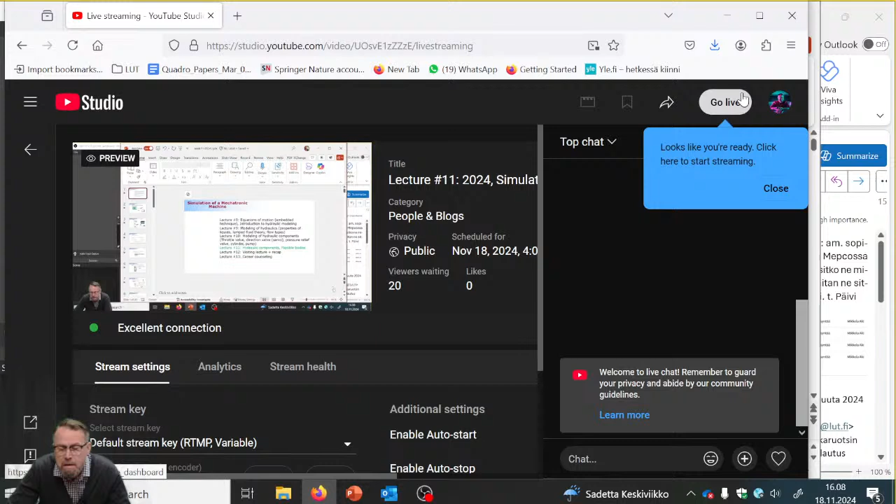Okay. So particularly I'm interested to see how is my voice. Is it loud and clear? So if you can listen to me. So it's going to introduce a little bit of echo, but I think it is okay. Is it loud and clear? Is it loud and clear? Okay. Nope.

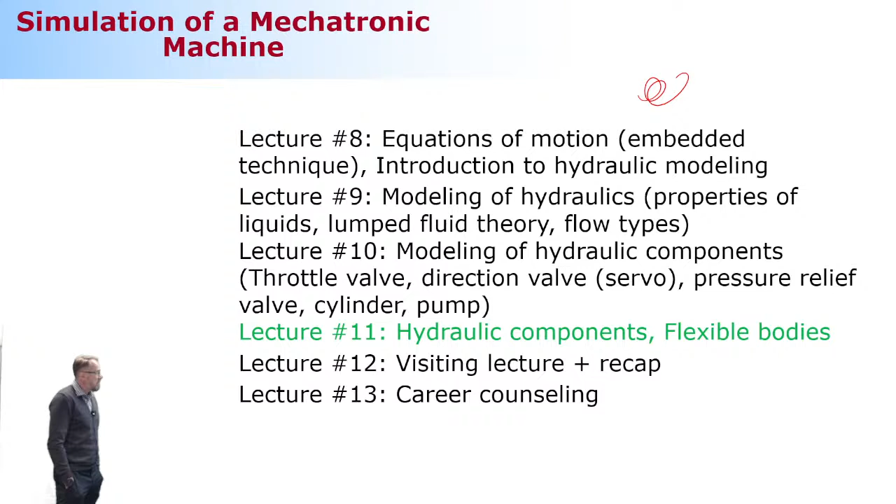Right. So we're here in lecture number 11. As we discussed just before we got started, we are approaching the end of the class, the end of the entire course.

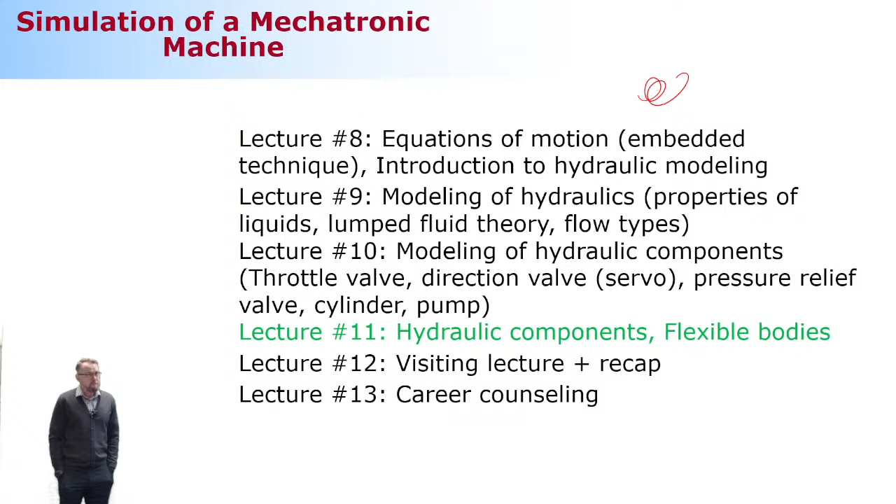And what follows after this week's lecture is going to be a visiting lecture and the summary. A summary about the stuff that you're expected to see in our next midterm exam. The next midterm exam, by the way, is something where we should discuss the practicalities a little bit, because it's possible that we are able to cover all the theoretical aspects by next week.

So would you like to make this next midterm exam earlier than originally planned, or would you like to keep it where it is planned to be? How do you want to go? Before answering that, please keep in mind this. You might think that everything is going to be so pleasant and nice before Christmas because you have plenty of time, and you definitely don't, because all the deadlines are just before Christmas. There are all the other examinations and midterms just before Christmas. So Christmas is the most stressful time ever.

So what do you guys think? So now your answer. Keep it, in my opinion. So keep it where it is. Yeah, keep it where it is. We can make a WhatsApp poll. Yeah. So what is WhatsApp saying? The poll, and we can get results out between the class.

All right. What about this? Because I'm so impressed about what you mentioned about my haircut and appearance and stuff like that.

What about this? You have 2 weeks' time to do the exam, so you have more flexibility than usual. We can get started 1 week ahead, and then the usual week, and 2 attempts. How does that sound? Is that the best solution? Okay, so that's the way to go. We're gonna put the exam on in week 13, whatever week that is. I'm not even sure what week that is. So the exam will be open.

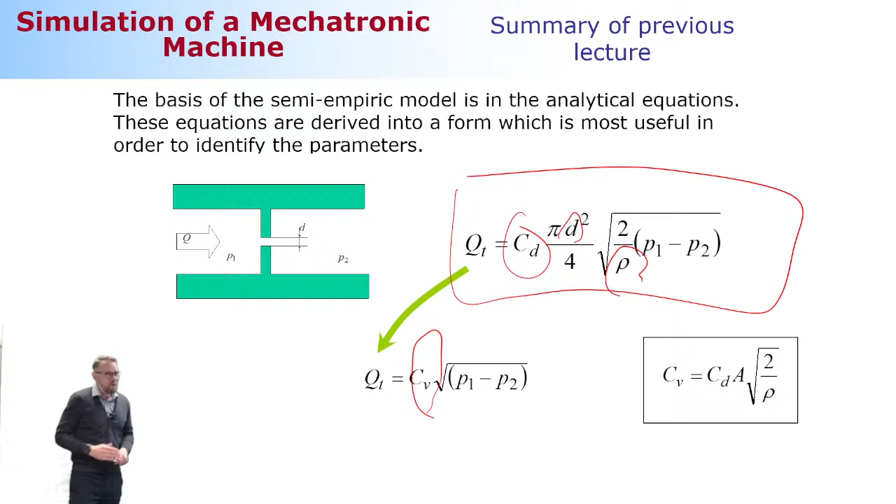The father figure behind it, you still remember that? That is Heikki. So make sure that next time you see Heikki, you salute and say, what about the king of the semi-empirical modeling method? How are you doing today?

Okay. All right. So then we discussed components other than a throttle valve. The modeling of components consists of two steps. First, we need to understand where the moving component is located. And the moving component is very conventional in hydraulics. An example is a directional valve where there's a spool that is traveling back and forth because of the magnetic forces. There are other forces also acting on this spool, but typically it's assumed that the magnetic forces are big enough to compensate the other forces like pressure forces and flow forces, and that's typically the case. So modern directional valves are designed in a way that magnetic forces are big enough such that whatever position you desire, the valve can get this position, no problem whatsoever.

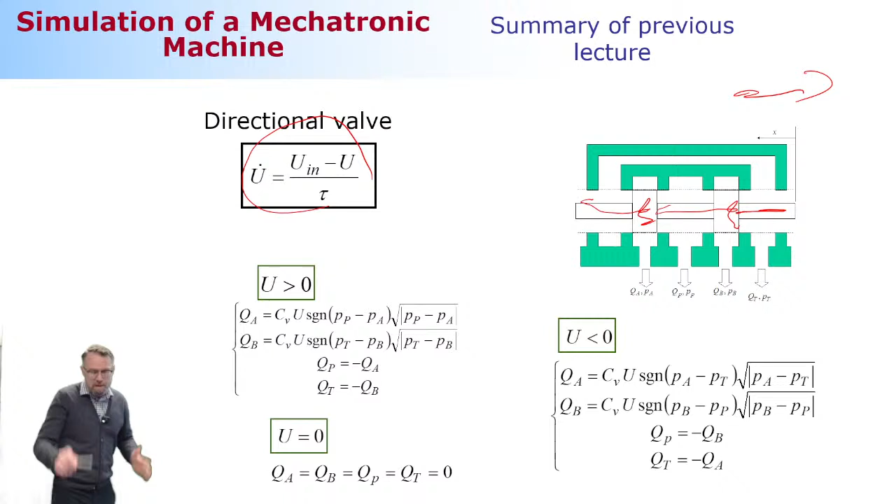Okay, two steps. First, you need to know where the moving component is located. And here, the moving component is this spool. The spool is traveling back and forth, and when it is traveling back and forth, it is closing and opening the different connection possibilities. The motion of the spool can be modeled by using a simple first-order delay equation. This is nothing but a delay equation introducing the inertia of the spool, because the spool is not very heavy, but still has something other than zero mass. And because of the mass, there's an inertia that does not allow this spool to move from one location to another in a very short period of time, but it comes with a certain delay. The delay is introduced by this equation.

What do we have in this equation? So we have here the input signal that is coming from the control algorithm. It may be coming from a joystick that is operated by a human. Those are the typical possibilities. And then I have the spool position here. U dot is here, this is U. And then this is something that is called the time constant. The time constant defines how fast you can move from one location to another. This is almost like the relationship between the magnetic forces and the spool weight, spool inertia.

Okay? Now you have three different scenarios depending on how you're moving your spool. If you're moving the spool to the left side, this is going to be your scenario. And look at this. We are assuming all the time that the flow through the component is a turbulent flow. How do I know that? I know that because the pressure difference is under the square root. So pressure difference and flow rate, which are the basic primary quantities we are interested in, are quadratically related. And then comes the spool position, and then the semi-empirical parameter that tells me how big the valve is, what's the size of the valve.

This one here, sign, is just taking care of that there is a possibility that the flow can travel the opposite direction. It's possible if something is off in your hydraulic circuit. All right, so this is the first scenario. Second scenario is that nothing is traveling whatsoever, so no flow whatsoever. And then if you move your spool to the right side, these are the connections.

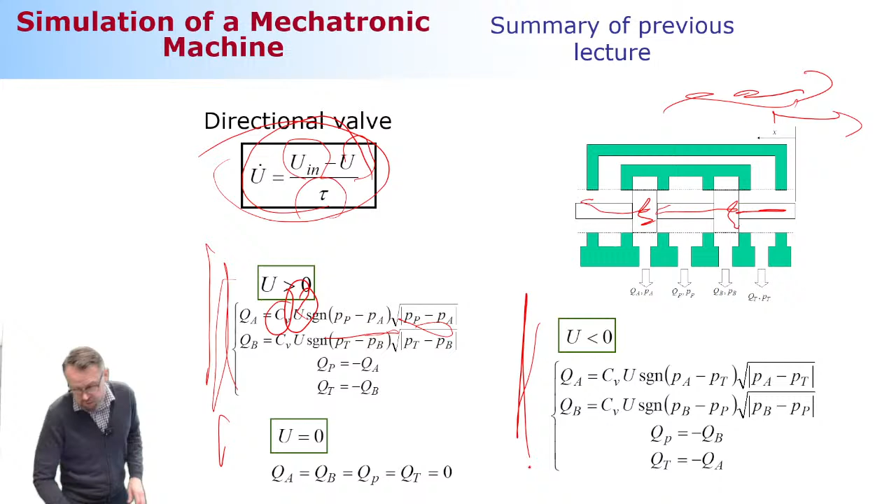Okay, then we learn about a big promise, which is called digital hydraulics. Digital hydraulics takes this moving component, the spool, away and replaces the spool by multiple on-off valves. And these on-off valves can be on or off. So they have no opportunities between these two extremes. So they're either fully closed or fully open. And that's it. These are the two possibilities. So it's not working in the same way as the spool, which can have pretty much any position you want.

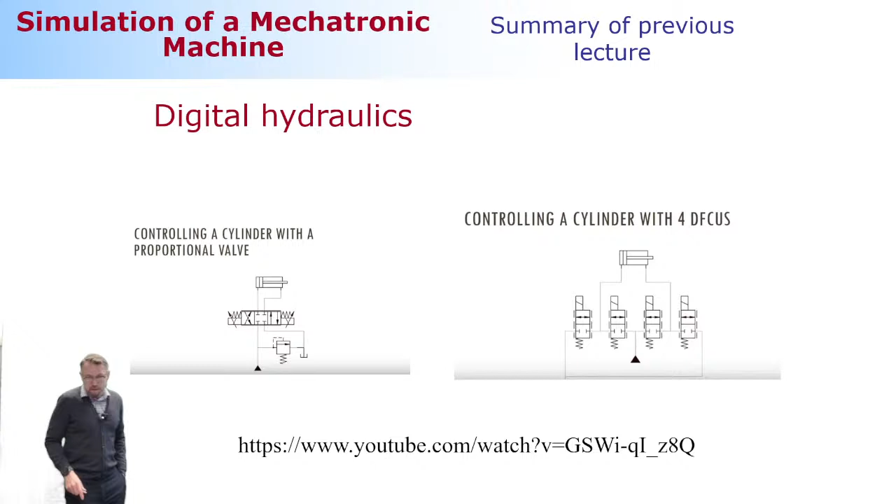And the biggest thing is that there's a possibility of a bit more efficient energy consumption. That's a big deal, of course, because hydraulics is typically based on pressure losses. The control is pressure lossing. Pressure loss is equal to energy loss. And that's what we don't like in a modern society anymore. It was not a big problem a little while ago, but now it is a big problem. Okay, anyway, so this is what we learned. Today we're going to discuss a little more about that.

The pressure relief valve will be left to you as a reading assignment because this is a painful, complicated component that I'm not going to ask in the written midterm exam. But if you choose to go to a written exam, questions are like, derive me the pressure relief valve equation starting from the Big Bang. And it's going to be so difficult that none of you will pass this exam. So please take the midterm exam opportunity, because the final exam you will not survive. There is no way to survive.

All right, but let's take a look at this. So this is what the pressure relief valve looks like. And of course, the drawing symbol for this component is like this. So it's a box, and then I have here an arrow. This is where the line is connected. This could come from the pump, for example. This line is connected to tank. And then there's a spring. And then there's a pilot drilling here.

And what happens here in reality is that this spool, a moving component this time, moves up and down. And when it moves down, it closes this connection here, and it's going to be the operating condition shown here. So then there's no flow whatsoever. But what happens when there's no flow? This pressure here starts to increase, particularly if the pump keeps on producing energy in the system; the pressure increases all the time in this particular location.

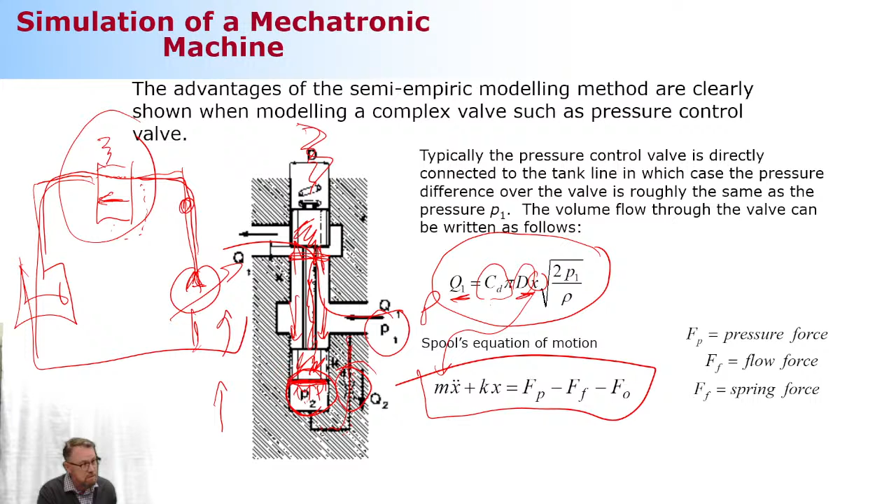So what Heikki discovered is that this equation, which is pretty complicated, can be replaced by this first order differential equation. You solve the K from this equation. You put

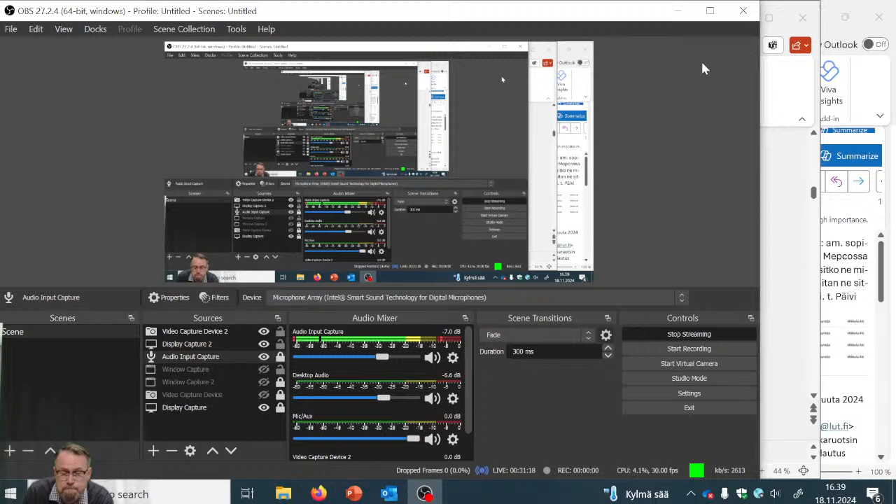Is this any better? I think the voice is back. Yeah. But now it's like super loud. Is it a little too loud? No, I just... Yeah, but I think I'm still too loud because I see that I'm red all the time. Oh, you don't even see this. This is my OBS system. Are you guys, by the way, using OBS when you do your YouTube videos or no? You don't do YouTube. Okay. What about the WhatsApp community? Are they saying that they're happy again? They're happy. Okay, good. I think I made a mistake in my settings because of the new gadget. I selected an incorrect channel and that somehow got stuck. Should be fine now because the audio input capture is good. All right, let me take myself back here.

Okay, so online participants, there was the best joke ever. You just missed it. People here in the audience were laughing like they thought they were going to die because it was so hilarious. And because my memory is strong but short, I don't remember the joke anymore. So we're going to just go. Okay.

All right. So, hydraulic cylinder. This is a component that converts hydraulic pressure to mechanical force. A two-way cylinder like the one depicted in this slide produces force in such a way that there are two pressures affecting the amount of force produced by the cylinder. The pressure in the piston side multiplied by the corresponding cross-section area is the one pushing the cylinder rod in the right side direction.

Then there's another force pushing in the opposite direction, which is the pressure applying in the piston rod direction, multiplied by the corresponding cross-section area. This cross-section area is smaller than the other one because of the piston rod itself. So it's the same size minus the piston rod cross-section area. Okay, so this is the force produced.

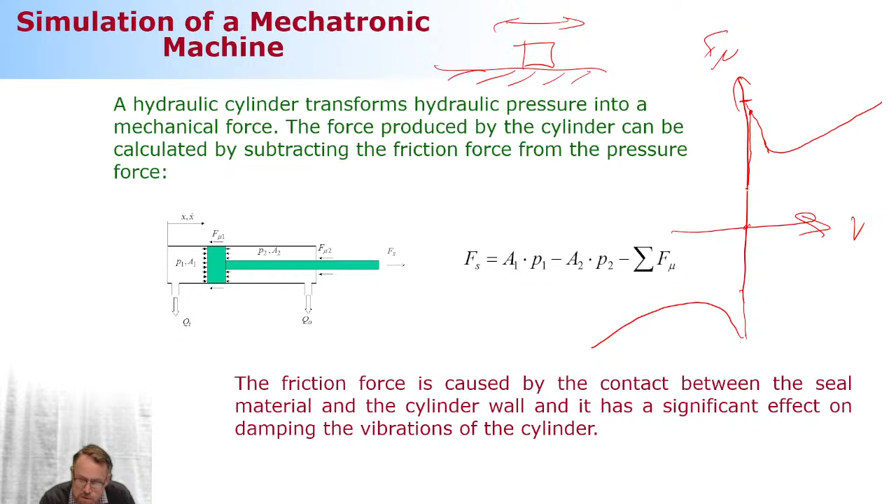So what you need to do, you need to fool your simulation model and say, hey, take it easy, because when you're having very small velocity, you can actually cross it through the origin like this. And this is the curve. Forcing it to travel through the origin is needed, because otherwise there will be a discontinuity. Discontinuity is something that the simulation hates the most. They really hate it. They cannot get along. So it's absolutely impossible that you have discontinuities. No, it's still possible, but let's say that it is a hard thing to deal with if there are discontinuities in a simulation model.

I said this incorrectly, because there are cases that you can actually, there's a branch of dynamics which is called non-smooth dynamics. Non-smooth dynamics is something where you can take these discontinuities easily into account, but that's a family that most of the doctoral students, even the ones that are specialized in simulation, are not really familiar with. So this is quite a special technique. But some of the game engines use technology that is based on non-smooth dynamics. So what the heck is this thing?

Guess where you can learn this? Correct. Simulation laboratory course. Like how to live a good life. Guess where you can learn that? Simulation laboratory course. Okay, enough about marketing, but is this clear now?

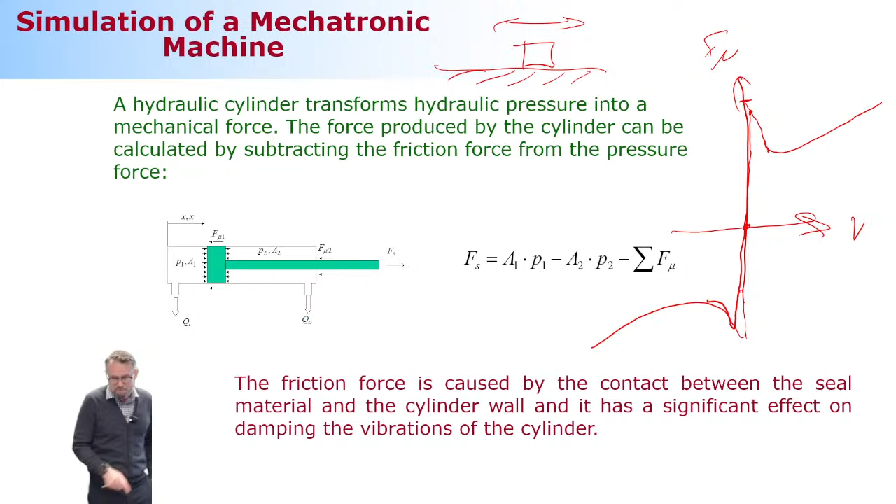Clear. Okay, very good. We were here. The pump is the last component left. What we are thinking the pump does is produce flow rate. This is a little bit of a chicken and egg thing, because when you're restricting the flow rate, what that's going to give you is the pressure. But we're always assuming that the pump will produce the flow that is coming out from the pump. And when you're not allowing the flow to go freely, you're restricting it, you're going to get a pressure. That's the mechanism how it is thought to behave, because it's the mechanism to produce flow to travel forward.

And how are these mechanisms? Of course, there are many different ways how you can make it happen, but the standard way is like a piston pump, but there could be other ways that you can produce the flow to travel forward too. But here it is. So in a modeling perspective, we are assuming flow to come from the pump. And then it comes to the first volume. And if the incoming flow rate is more than the outgoing flow rate, it starts to produce pressure that is increasing until they level off. This is how we think things happen.

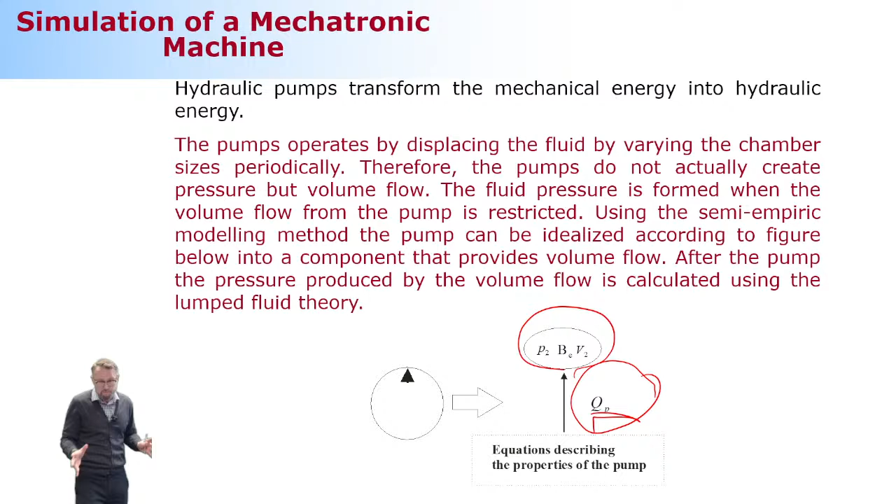Now, pump technology is something where we have two basic choices: fixed volume pump or variable volume pump. A fixed volume pump is something that keeps on producing the flow rate, this guy here, regardless of need. You can consider this as a flow to the system, and it keeps on doing that, even though it is not necessarily needed in the system. Then you need a pressure relief valve to take the excessive amount of energy from the system. You put the excessive amount of energy back in the tank, where the pump is sucking it and putting it in the system. And again, if it is not needed, it's going to be circulated with no limit. Because it's circulating that much, you even have to have some kind of cooling system to make sure that the fluid itself is not heating too much. Okay, so fixed volume pump.

That is a simple model, because what we need to know is how much is the power of the motor that is running the system. Typically, in industrial applications, these are operated by an electric motor. You know the capabilities of the motor, the max power that it can produce. If it is a diesel engine, you know that too.

Diesel engine typically is designed such that in mobile machinery, the diesel engine is running with a constant RPM. Even when you're pushing the pedal, the RPM stays where it is designed to be. It's just controlling this in a little bit another way. Okay, this is not entirely true. There's a possibility to increase the RPM as well, but in a standard way, there's a constant RPM to be operated in an optimal range, and that's how it's operating.

Fixed volume pump works like this. You have this power equation: power is equal to the flow multiplied by pressure. Now the flow is the one that we are interested in, so we would like to solve it out from this equation. So we can solve it like this. Mechanical efficiency needs to be taken into account, which is pretty good too. This ranges from 0.8 to 0.99, something like that region.

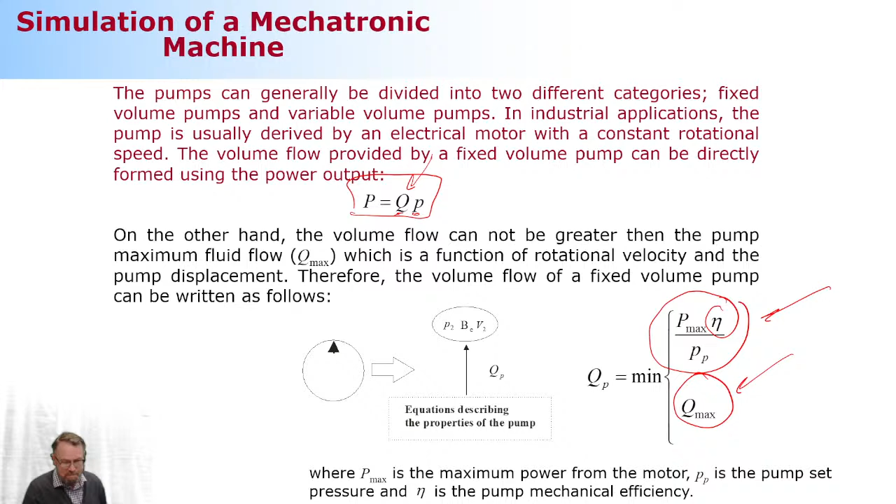What about the alternative? What if there is some kind of control mechanism, where you're producing the flow rate depending on how much is needed? Here comes a wide variety of applications and ways you can do this control. You can control by measuring the pressure right after the pump, controlling the flow rate based on that pressure. If you are happy with the pressure right after the pump, you're reducing the flow rate, putting your energy production lower than it otherwise would be.

Then there are way more clever systems where you're monitoring the pressure in multiple different locations in your hydraulic circuit. This monitoring is typically right next to the actuators. You're selecting the highest out of the many, and then making sure that, with respect to that pressure, there is always some kind of reference. So there's always a reserve available for you, and the reserve is something that is constant.

So if the max somewhere near your actuator is 100 bar, and your reserve is 20 bars, you make sure the pressure available right after the pump is 120 bar. If the pressure in your hydraulic cylinder is 50 bar, then the pressure right after the pump is 70 bar. So that's how it works, and this is another way to control the flow rate. You got it?

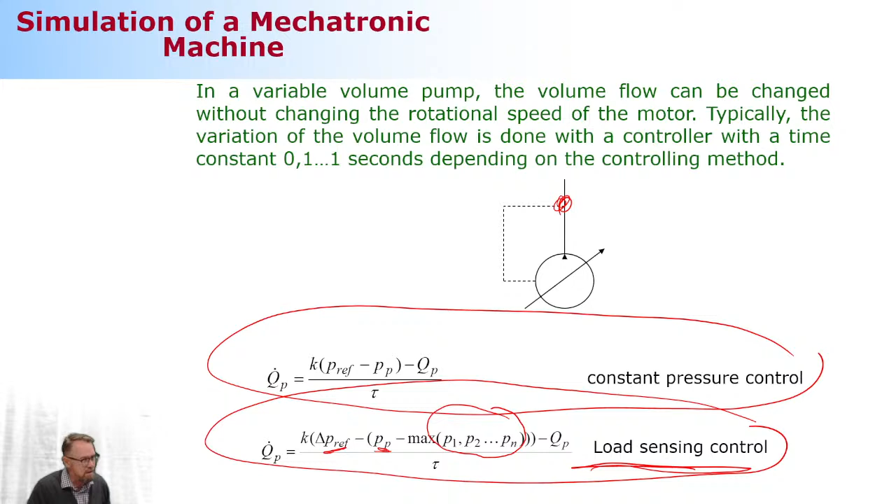This one I just mentioned, where you're monitoring the pressure right after the pump, is constant pressure control. When you're monitoring the pressure in multiple locations, typically close to the actuators, this is called load sensing. So you're sensing the current load and making sure there's a reserve available for you at any given time. There's a fantastic YouTube video that we are about to take a look at that clears the issue. This one.

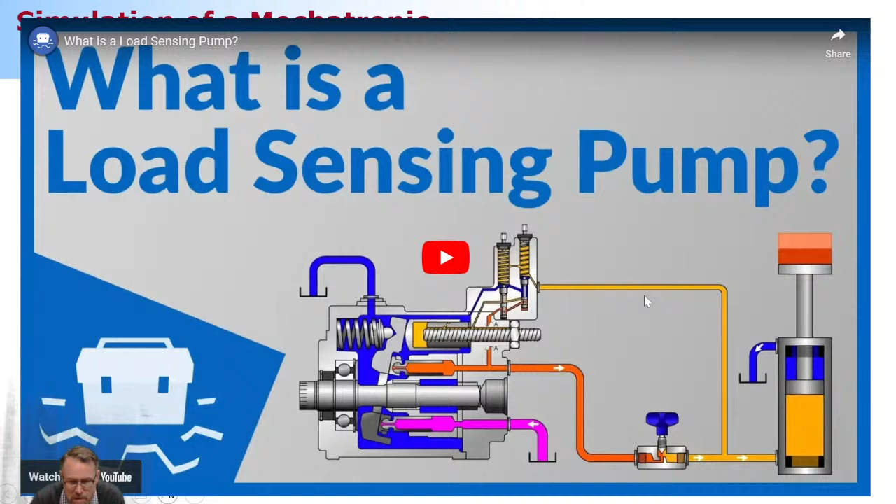Oh, no, thanks. Is there any way that I can? No. What about the online participants? Can they hear this? Yeah, but I think I need to put the volume up. Hold on. Our speakers will go here. Okay, let me try it. No, you don't see it. Let me try it like this.

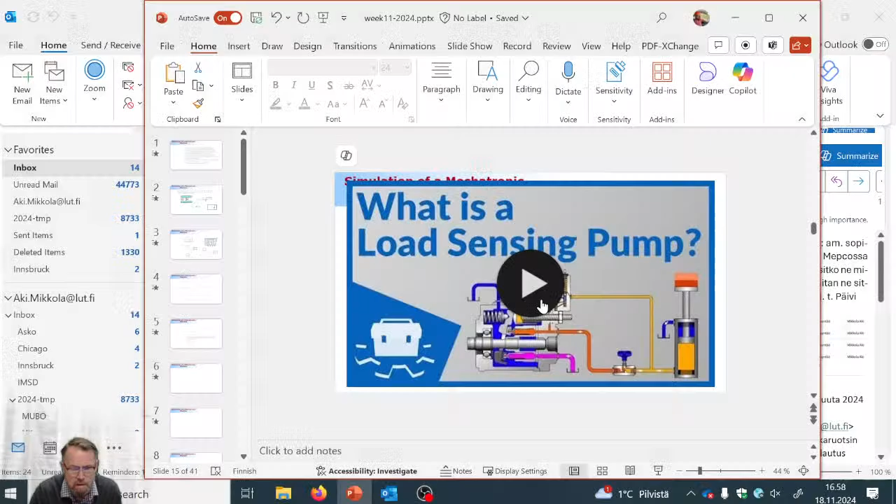Today, together with our partners and customers in 6 countries, we are recreating logistics. We are here to serve, to care for the people, and for the future generations. Times change. Mission remains.

Welcome to Lunchbox Sessions, bite-sized industrial training. Hey, it's Carl here from LunchboxSessions.com.

This will be a brief introduction to load sensing pumps, sometimes referred to as flow compensating. Our pump still has that very heavy spring, that major adjustment called the pressure compensator or the pressure cutoff for when we hit that really high top end pressure to make sure our system is protected. But it also has a weaker spring called the load sensing adjustment or the flow compensator.

And that flow compensator is receiving information, feedback if you will, coming directly from the load, our cylinder, which right now is working at 300 psi. That's the pressure it takes to lift the cylinder and rod. And that 300 psi is being fed back to the controller and giving that spring a boost. I could tell that the spring is actually set to 300 psi.

How did I figure that out? I figured that out because our pump outlet pressure is set at 600. So it's taking 300 from the load and adding it to the 300 spring setting. And those two pressures add together, those two forces add together to give us our regulated pump outlet pressure of 600 psi. This is different from a pressure compensated pump, which might be set at, say, 2000 psi at all times, and therefore using a lot more input energy.

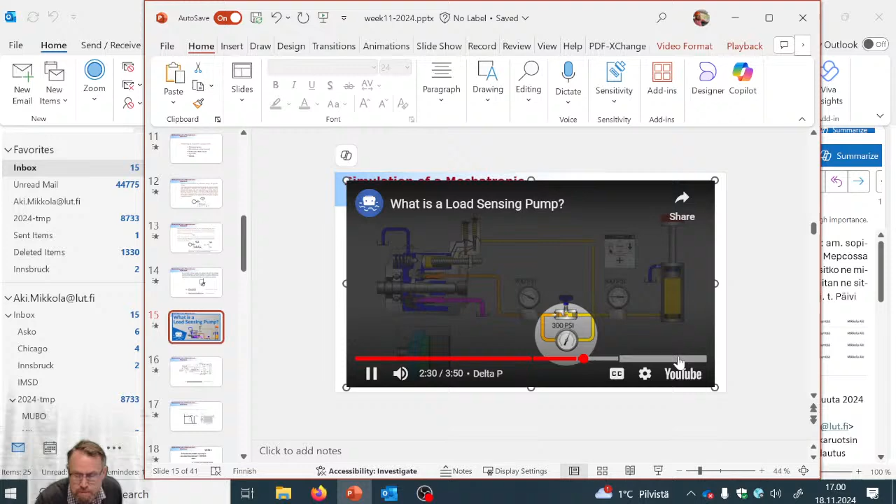What we're finding out is that we're always maintaining a 300 psi pressure differential, sometimes referred to as a 300 psi margin pressure when we're referring to load sense systems. Let's add one more brick, and this time watch the delta P gauge. The delta P gauge fluctuates for a brief fraction of a second, but quickly we find it returns to 300 psi, and we never really noticed any change in speed at the cylinder.

The cylinder just kept moving nice and steady, and our pump found out that it needed to increase the outlet pressure setting automatically. So what we found out is we can have a pump that is set at a pressure that's just a little higher than what's needed at the load, instead of being always at the pressure cutoff pressure, which could be considerably higher.

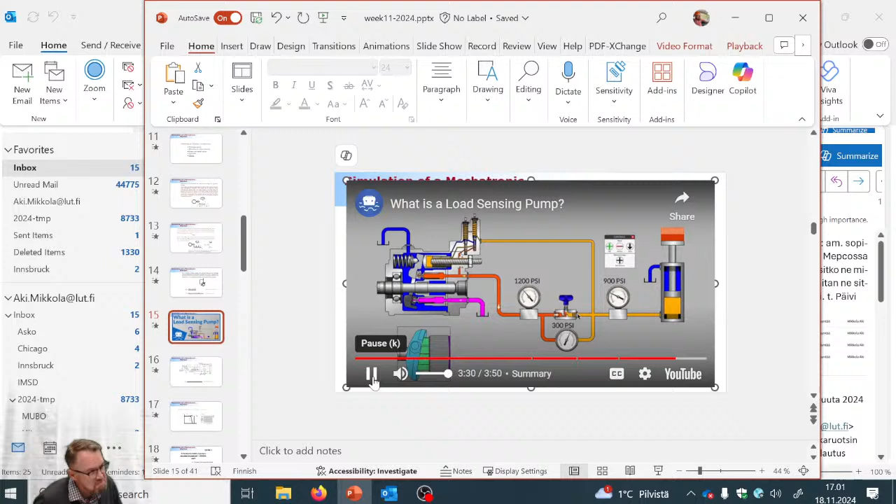And because we know we want steady speeds to our hydraulic cylinder, we don't wish to see any fluctuation in speed. Every time we take a brick off the stack, or every time we add a brick to the stack, the pump knows to adjust itself accordingly so that the flow rate through the needle valve doesn't change. That's the nature of a load sense system, and that's a brief introduction to load sense pumps.

Okay, pretty clever. And the feedback can come from multiple locations. So here was one location. So actually the idea is that you can have multiple actuators, each one of them monitored. And you look at the highest pressure and make sure that there's always a reserve available, so you can still move in the direction you want. So that's the idea. So that's pretty much the best you can get in mobile machinery today, load sensing pumps.

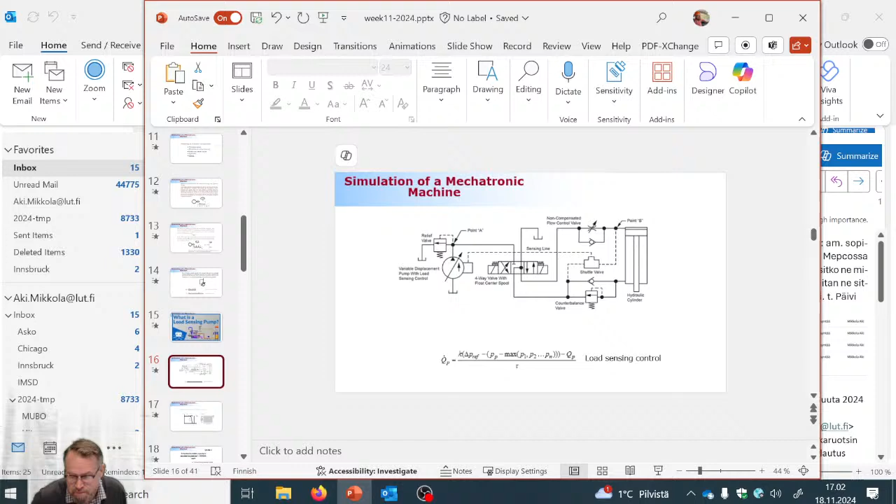But this was something that you guys were already aware of, right? Because Heikki, I'm sure he explained this story multiple times to you already. Kind of, in his own ways. Okay, very good. All right, so I know we need to have a break, and we will do so momentarily. So let me put this back on. And let me just wrap up the case about the pumps, and then we get to go.

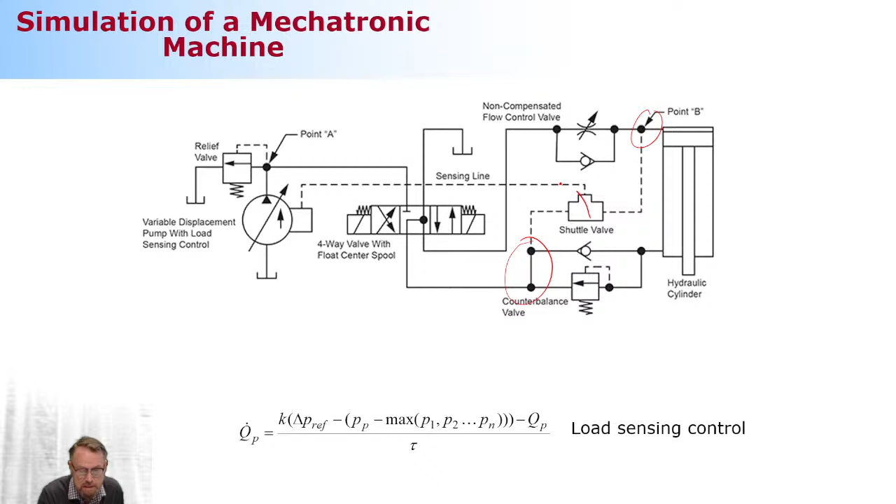Again, here is the case where, in this kind of system, you're checking the pressure at two different locations, and then you're selecting the highest, and the highest is the one you're using for controlling your load sensing pump. A parameter is needed because, remember, the model that we're using is this one. We need to get this time constant, so we need to get that from this K parameter. We can get it from the manufacturer's catalog.

For details, you need to take a look at my lecture notes. But again, this is a semi-empirical modeling approach where the unknown parameters you can get from the manufacturer's catalog. This is it. I have 2 in-class quizzes today.

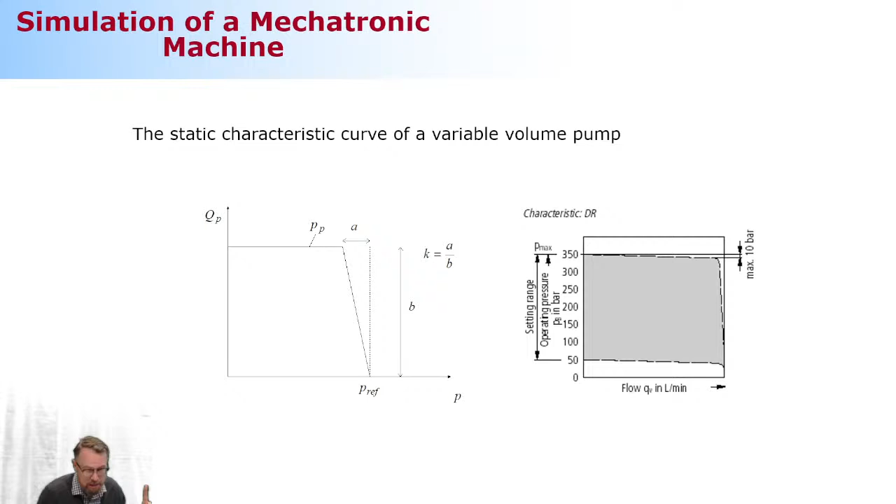Okay. All right. So once you're done, then you can have your, how much do we need today? 5 minutes? Is 5 minutes okay? Five. That was a question. 5 minutes, is that okay? Thank God I don't have any more complicated questions than that.

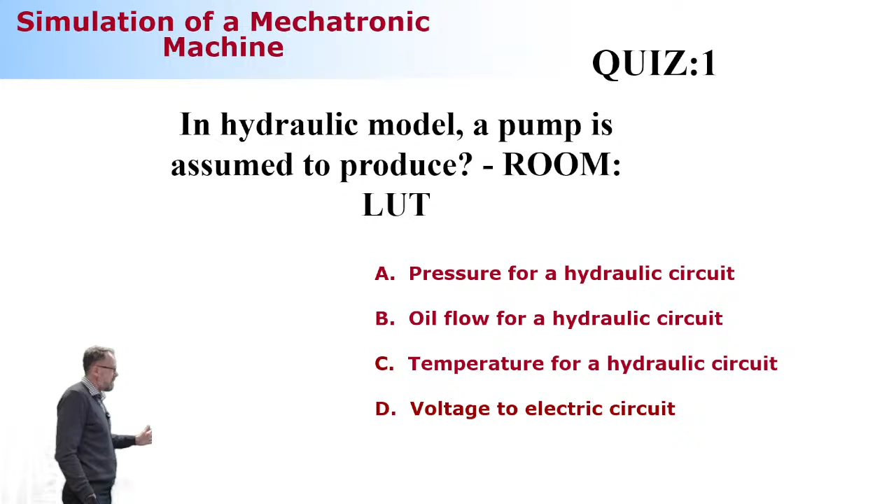Okay, 5 minutes. So once you're back, we're going to take a look at these in-class quizzes. Now let me explain what follows. Then we're going to take a look at this particular example, so we look at how you can create the model for this example hydraulic circuit. And once we're done with that, then we're going to move on to flexible bodies. Flexible bodies, like I say, is going to be an overview,

something that is at a level good for you to be aware of. But are you guys familiar with the method that is called the finite element method? Finite element method, okay? So that is when you're discretizing your structure into small elements. The small elements are connected together at nodal locations, nodes. You're solving the nodal degrees of freedom. Okay, good, because this is a method we are not using. No, we're using that, but we're using it with a certain kind of special technique, which is called the modal reduction technique. Okay, all right, but let's have a 5 minute break and then come back.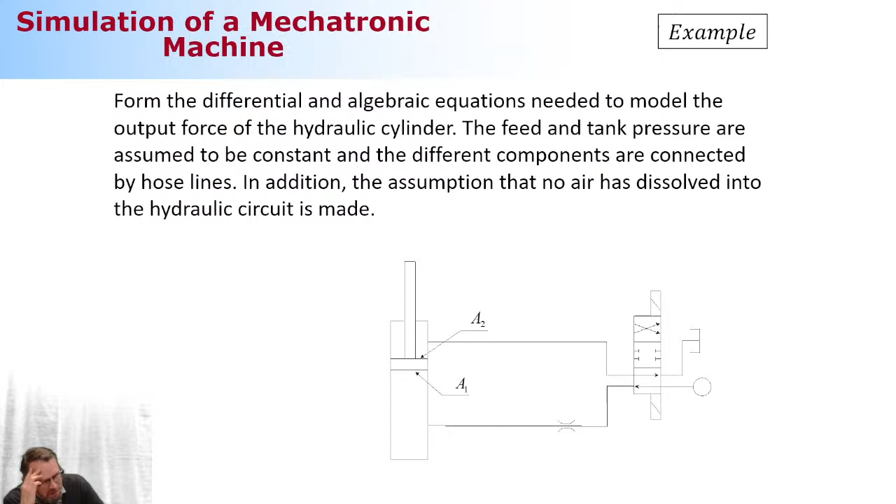Did I get any comments about the quality of voice? Is it any better? Yeah, they say the voice is better now. First, they say you were looking smart. Yeah, so each one of them would like to score a 5 out of 5 from this class, I think. The second one, the voice is better. Yeah, I think it is better. And it's kind of stupid to wear this headset when you are in the middle of people. That's another thing that I don't like so much. Okay, so it is an improvement then. I just don't know about this battery. Oh, they say the battery is still okay, so I think it can easily handle a 2 hour lecture.

Yeah, nice. Like that? DJI. I don't know what brand this is. You can see from your mic. From my mic? Can you read this? Yeah, it's a DJI. Is that a well-known brand? Yeah, drones. Oh yeah, DJI, you're right. They're making drones and those kinds of things. This was recommended by people who are doing YouTube videos for the university channel. And it's pretty expensive. I don't know, because I got it through this guy, so I don't know how much this cost. I have 2 mics, so I have another mic which is not with me, but I can use 2 mics.

I think this is perfect for interviews. So you have 1 mic for yourself, another one. 227 in Gigantti. So it's not that affordable. But I've been trying so many different ways to do it. Some years back I had a wired mic. Very, very bad idea. And then low quality wireless wasn't a very good idea either, because low quality wireless mics don't work. They are just not willing to collaborate. And now this seems to be finally the way to go. It's simple settings, because the only thing you need to do is just connect and go. Some other brand called Rode. Yeah, I think it is a good brand too. It's a well-known brand. Same price.

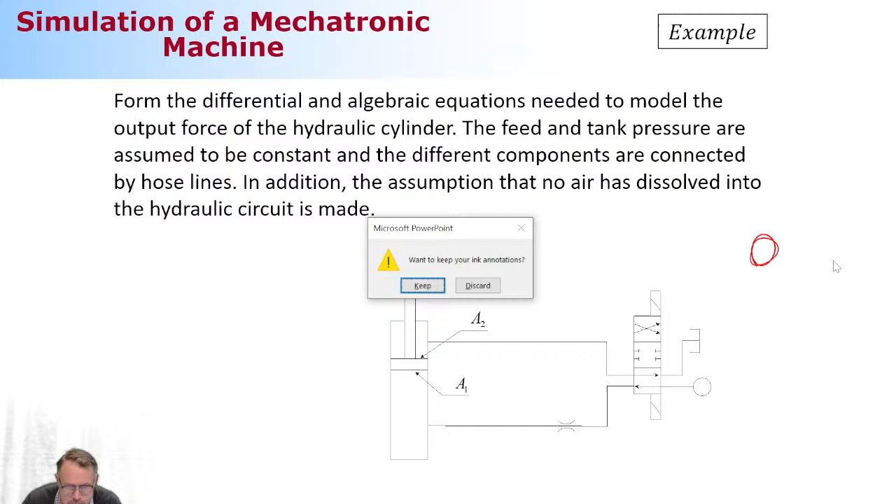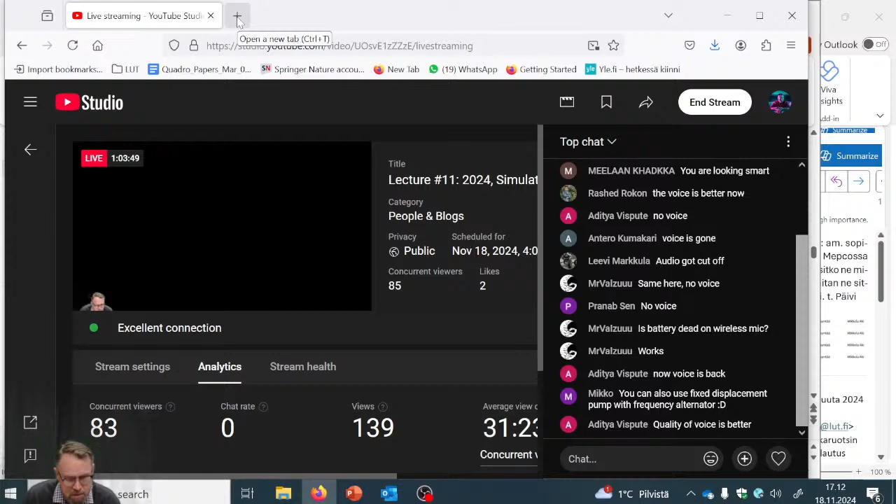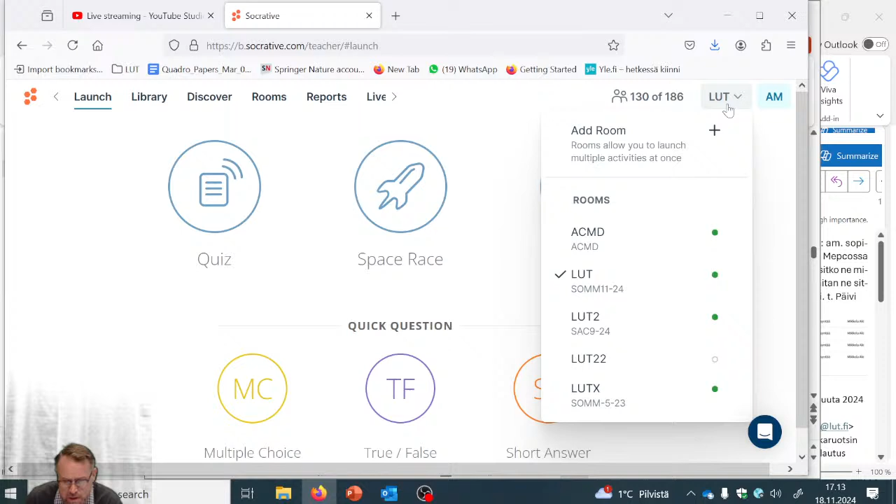Okay. All right, guys. So let's take a look at the in-class quiz. This one. No, this one. What? Where is my... and my Socrative is not... Here it is. You cannot see this, but I'm very confused because Socrative is supposed to be on, but how can I get into this activity that I'm currently busy with? Launch, because this is already launched. This is the only window that I have. Launch, reports, live. Okay, this is live. Oh, here it is. So it was simple like this.

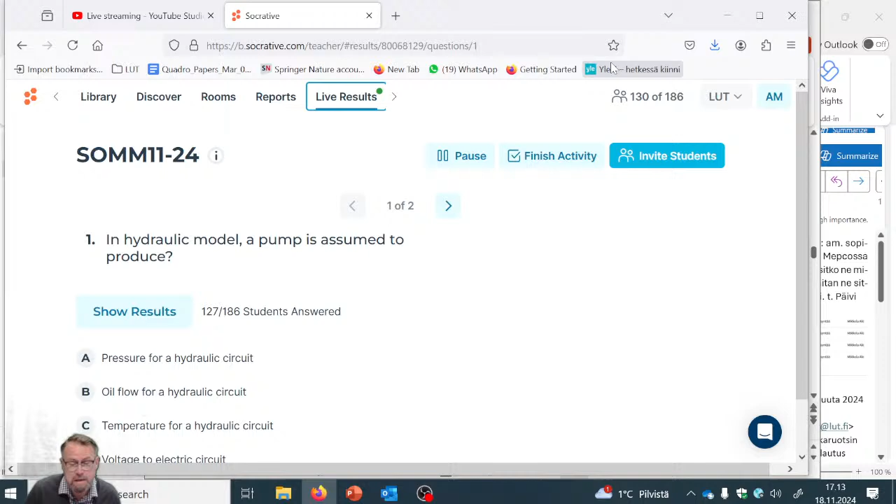Okay, all right, I'm very proud of you. I need to say this. I'm very, very proud of you, not because you're scoring so well in in-class quizzes, but more because the number of participants hasn't really dropped significantly. We still have 127 participants, which is a really good number.

Okay, is it going to be or is it not? 100%. Yes, it is 100%, because we've been talking so much about how we're producing the flow rate. It's very good. Not pressure, but the flow. Chicken and egg. And we decided that it needs to be the flow that is coming first. And then if you're restricting the flow rate, then you get the pressure. Okay, then there's going to be another in-class quiz, more difficult than this one.

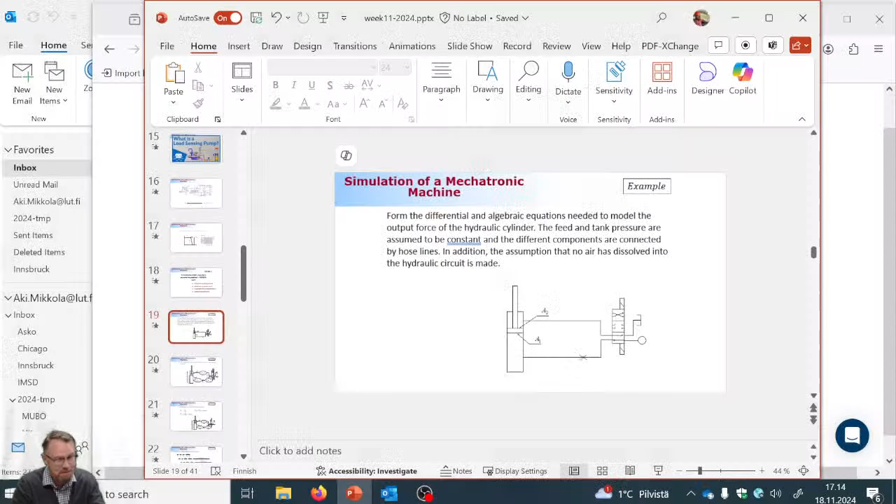By the way, I need to tell you this. I called the rector once, this was a couple of weeks back, and I called him again and asked, am I now fired? And he said, yeah, next time you do it, you are. Consider yourself to pack your stuff and leave. No, he said it was good stuff and he kind of liked this kind of thing. But this is our rector. A usual rector, you do a call like that, you can consider yourself gone immediately, because this job is going to be over. For sure a usual rector lets you go if you do something like that. Okay, all right.

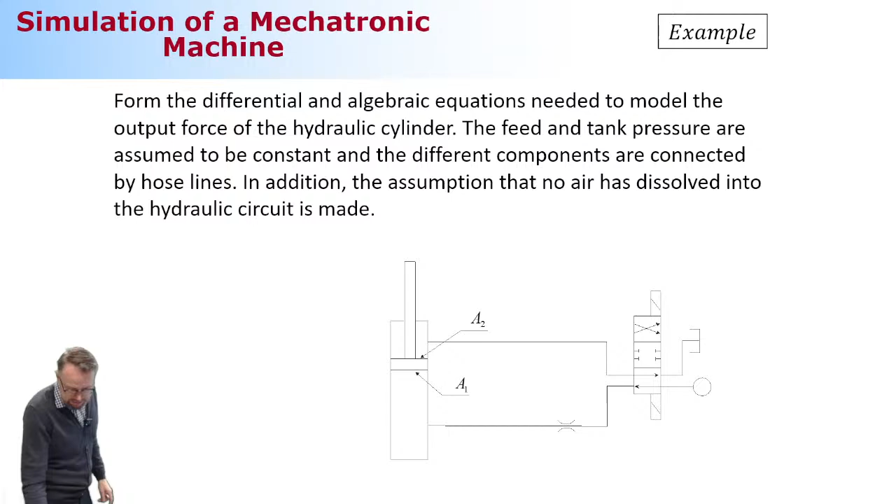So this is not a mechanism. This is a hydraulic circuit we're going to model. So what are the steps? Again, we're going to follow certain steps, and automatically we're going to get the equations we need. Number one, discretization, idealization. So we need to figure out the locations where the pressure needs to be computed. Here it is obvious to select the way I'm selecting it.

So if there's a direction valve and the direction valve is connected to the throttle valve, this is definitely one area where you need to compute the pressure. Why? Because the throttle, this component, will introduce the pressure loss. There's another volume where you need to compute the pressure, which is right after the throttle valve. Way back, when you look at the piston rod side, there's only one volume that needs to be considered. Now comes the very important thing.

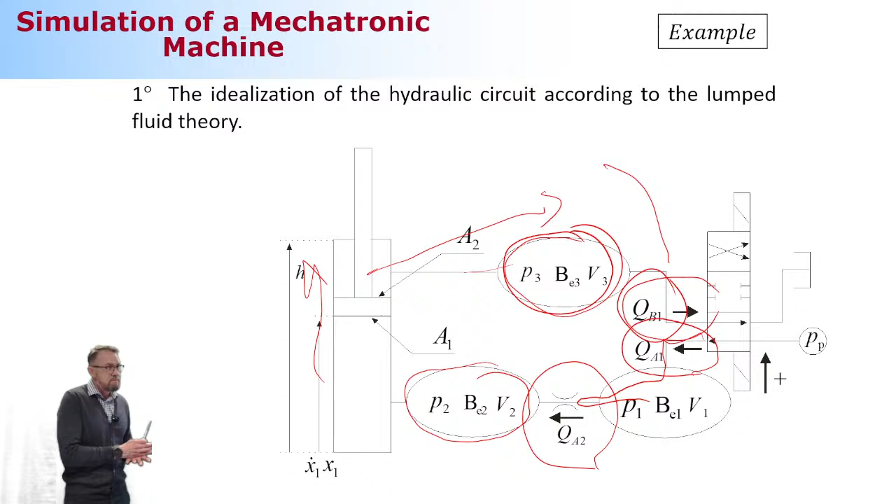So once you make this kind of the drawing, you just need to understand that, for example, here, when the piston is moving this direction, which is considered positive direction, the flow is coming in to this P3 and is leaving because of this one. That's how you can select the right plus and minuses. Okay, so this is an idealization.

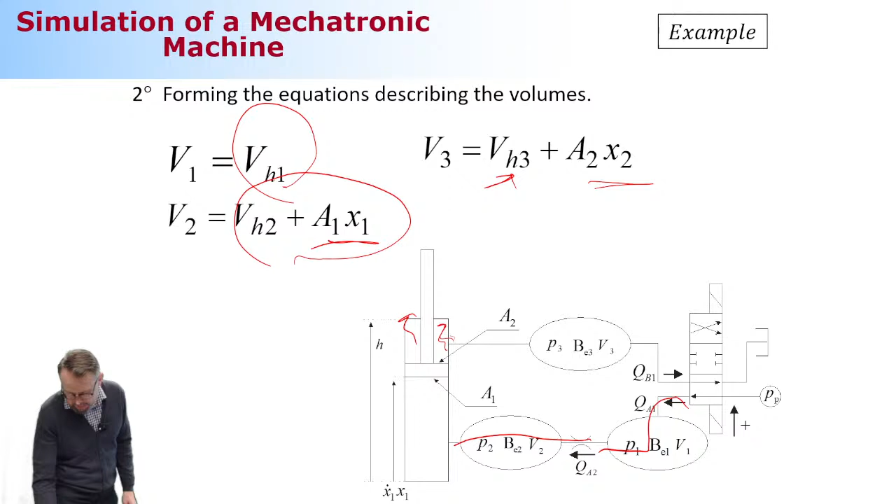The next, let's figure out how big are the volumes. First volume is very simple. It is the size of the hose, which is a hose line connecting the direction valve and the throttle valve. Then the next volume is a hose that is connected from throttle valve to cylinder plus cylinder volume. Then the third one is a hose line plus area that is associated to piston rod area. Okay, that's it. That was done with the step number 2.

Step number 3, bulk moduluses. How many bulk moduluses I need? 3, because I have 3 different volumes. So it's not enough to compute one and say, okay, this is it for each of the 3 volumes. Because each of the 3 volumes, you will get a little bit of different values. And you need to do it separately to ensure that the accuracy is in desired level.

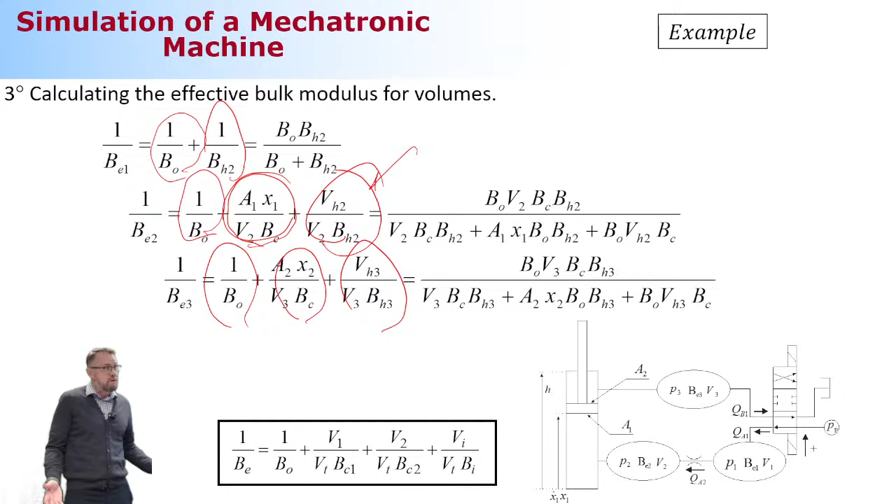So this is how you compute the first one. So it's only the bulk modulus of the fluid and the hose, nothing else. And the size of this is the same all the time. The second one is a volume in the fluid, container that is associated to hose, and the container, this is the hose, by the way, and container that is a hydraulic cylinder, steel container. Third one, fluid, cylinder, hose. So I'm assuming that there's no dissolved air, which is not necessarily the accurate assumption, but that's our assumption I did.

Step number 4, the most critical one. So now we are actually forming this first order differential equation to compute the pressures. And a seemingly simple procedure to follow practically is more complicated than you think it is. Okay, let's get started from the P2. This flow here is assumed to come into this volume. So it must have a positive sign. This one here is having the plus because of this arrow is coming in.

Okay, makes sense. When the piston movement upwards direction is considered to be positive movement, this piston motion is taking a flow off from this particular volume. That's why this one here is minus here. Rest, this was already computed. The only thing we're doing is that now we figure out the proper plus and minuses. Clear how I did the volume 2? Was that clear?

Absolutely clear. Okay, 3. This was computed earlier. This is bringing volume in, correct? And this is taking volume off. That's why the minus sign here. Now, based on this, can you tell me how it's going to be this one? Which one is in and which one is out?

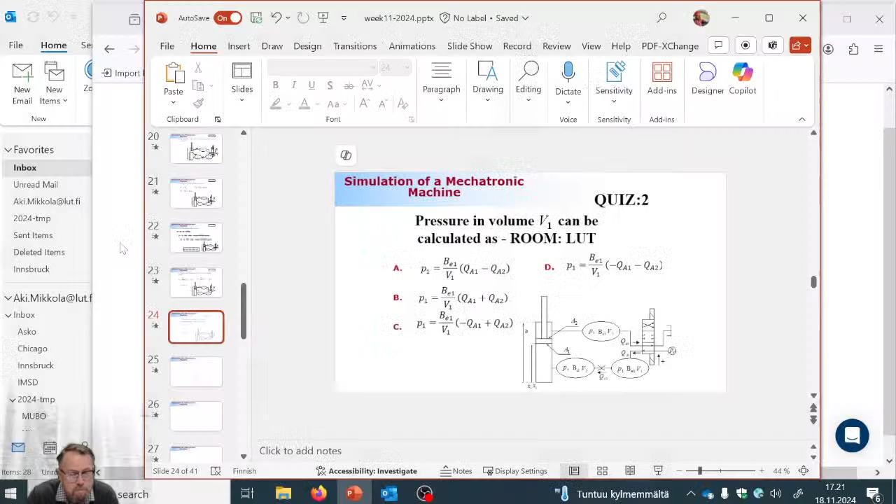Hold on. So it's going to be this is the last in class quiz of, sorry guys. No, it's not coming back. So let me try one more time. Yep, here it's coming back.

Okay, this is not very informative for you because you need to see these are the options. So let me try to make this a little bigger so you can see this clearly. So these are the options. Again, take a look at the arrows, how I'm defining the positive flow direction. Okay, is it clear? So what is the WhatsApp community saying? They're saying A.

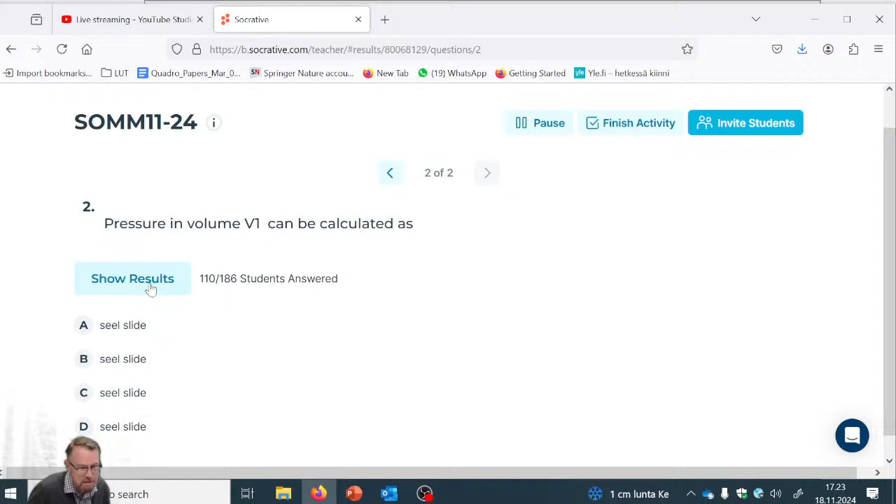108. Okay, what do you guys say? Is this it? This is it. So we are not going to collect any more answers. So it's 108, 110. 110 is good. Now we're going to close it. And the success rate today is 95. 95. That's not bad at all. That's very good. Okay, let me put myself back to the PowerPoint presentation.

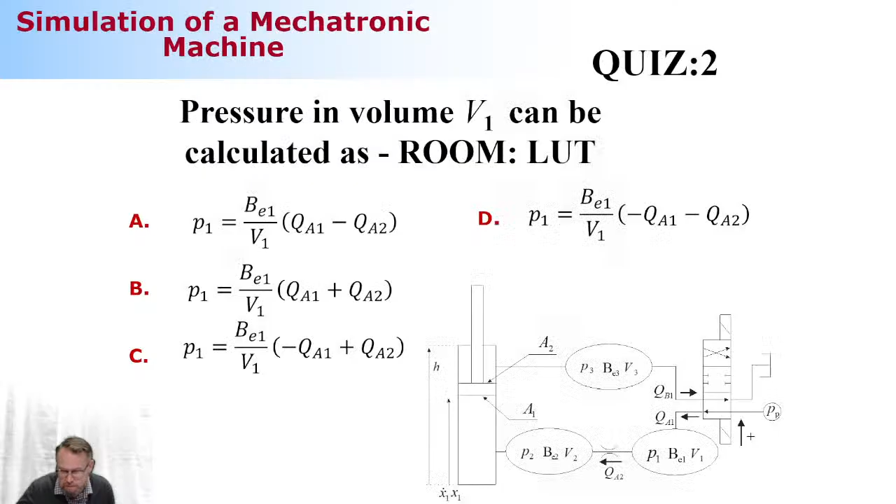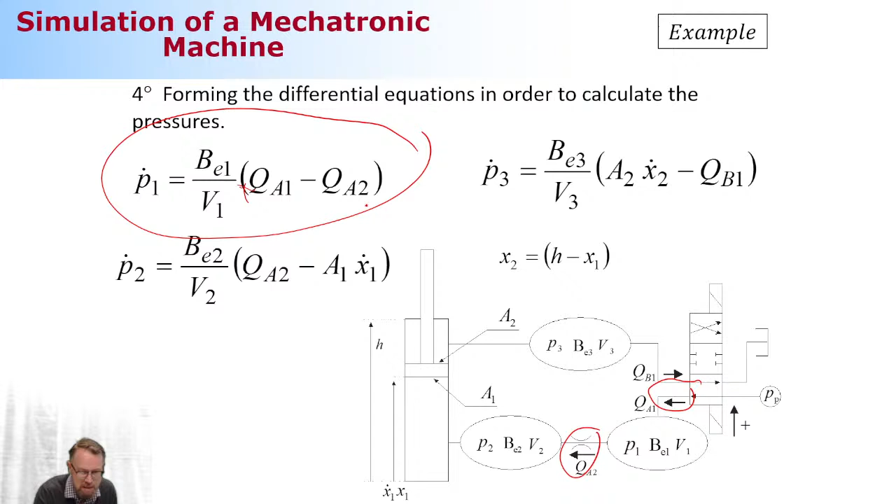And then let's take a few more steps. Here it is. This is what we were looking for. This is a correct answer because this obviously is coming in. This is leaving. So that's why this is having the plus. That's why this is having the minus. So it's not randomly selected.

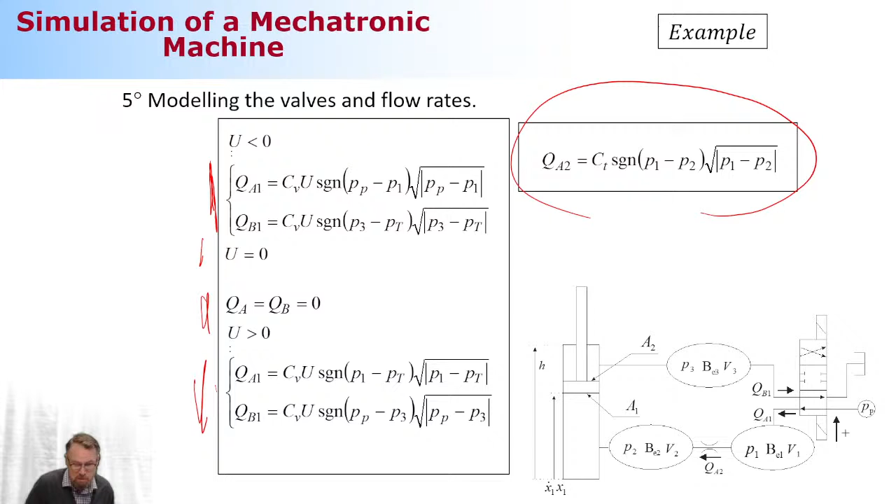Okay, valves and the flow rates. The valves having the three operation configurations depending on the spool position. This is what we discussed a week ago. And the throttle valve was something we discussed a week ago. So this is a copy-paste from the previous lecture. And the last thing, force produced. The force produced is very important because now we actually have a force that is somehow based on the reality.

And I really don't appreciate much these models where you have very complicated mechanisms but you're guessing how much force the actuators are producing, because then you're guessing the responses too. I'm sure you understand that. Another way around: if you have very accurate models of the actuators, but you're guessing how the mechanism is, that is equally low value for us.

So we need to follow something that is called the equal accuracy modeling principle. Something like that. I don't know if there's any official name, but the actuators and the mechanical components have to have the same level of accuracy. Otherwise, it doesn't make much sense.

Flexible bodies. Okay. So now I just said that the mechanism and the actuators need to be at the same level of accuracy. Sometimes what you need to do to increase the accuracy of a mechanical component is to take deformation into account. Or maybe you want to take deformation into account because you are interested in the strains and stresses.

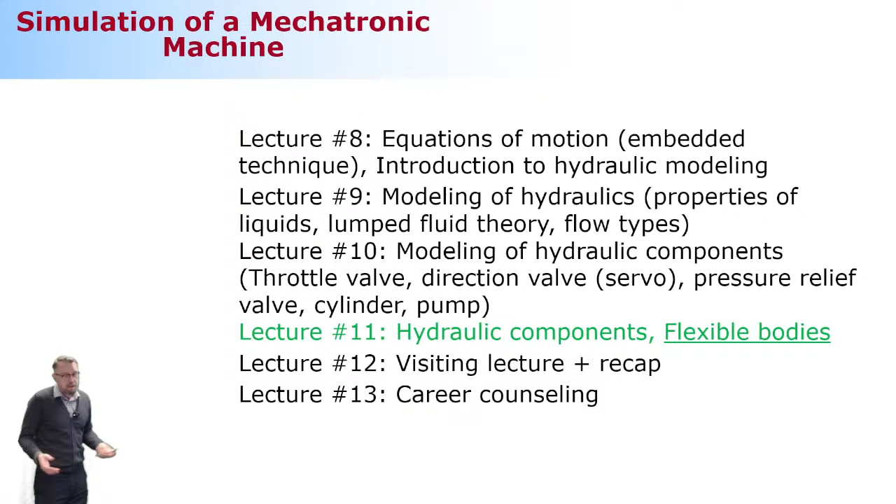You understand that if you have rigid bodies, then the rigid bodies don't deform, and because they don't have any deformation, there are no strains and no stresses, and you cannot get these quantities out of your model. Okay, how can we model the flexible bodies? Let's discuss this a little while.

You know that I mentioned in the beginning of my class that we make this assumption about rigid bodies. It is an assumption because every single body is a flexible body. But really the important question is when the flexibility is significant enough that it is actually contributing to dynamic responses. Now this is not easy to answer. There are some rules developed, but none of the rules are very good. This is more about not common sense, but engineering sense to define when the deformation is really significant enough that it needs to be accounted for.

Then this is a big problem because we learned that rigid bodies consist of a very high number of particles. Same is the case in deformable bodies. And in theory, each of the particles can move with respect to each other. That will mean that to model something like that, there's going to be trillions of degrees of freedom, which is computationally not possible to do.

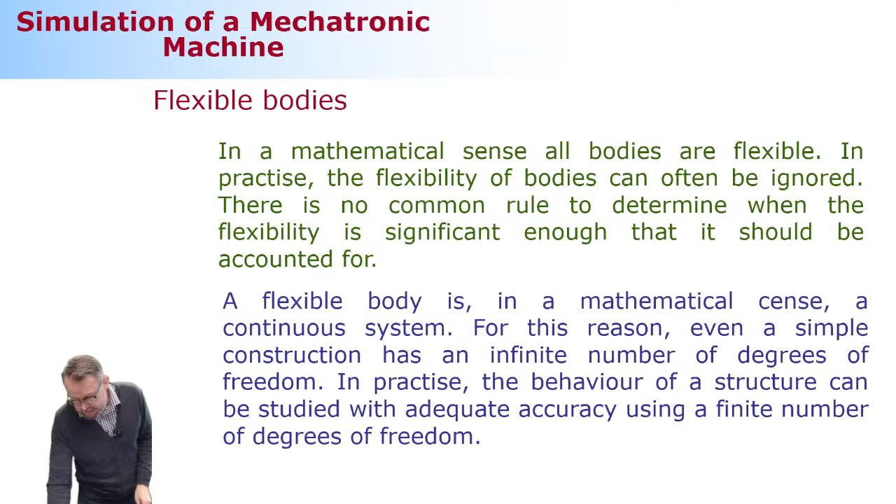So we need to discretize, we need to make a decision. What are the different ways that the particles can move with respect to each other? And this is going to tell us how many unknowns we're going to deal with when we're modeling flexible bodies. Now, the field of flexible multibody system dynamics can be categorized into two fields: small deformation or large deformation.

I'm going to shortly introduce you to the method that is based on the lumped mass approach, which is not strictly speaking a theory of flexible bodies, because it is based on rigid bodies. Between the rigid bodies, we're going to introduce spring elements and dampers to describe something which is seemingly a deformable body. But then I'm going to introduce you to another method, which is the floating frame of reference formulation. This is a method that is very good for deformation that is pretty small.

Flexible multi-body dynamics. I mean, the field can be categorized into two sub-areas, which are large deformation and small deformation. But the difference is how you are assuming the displacement and strain to be related. Okay, what is this?

So if you have a cantilever beam like this, and you have a force at the free end of the cantilever beam. Okay, now what's going to happen because of the force? There's going to be deformation like this. So at each point of the cantilever beam, I can compute how much it is deformed from the original configuration. This is called displacement. The displacement is a function of the length of my cantilever beam.

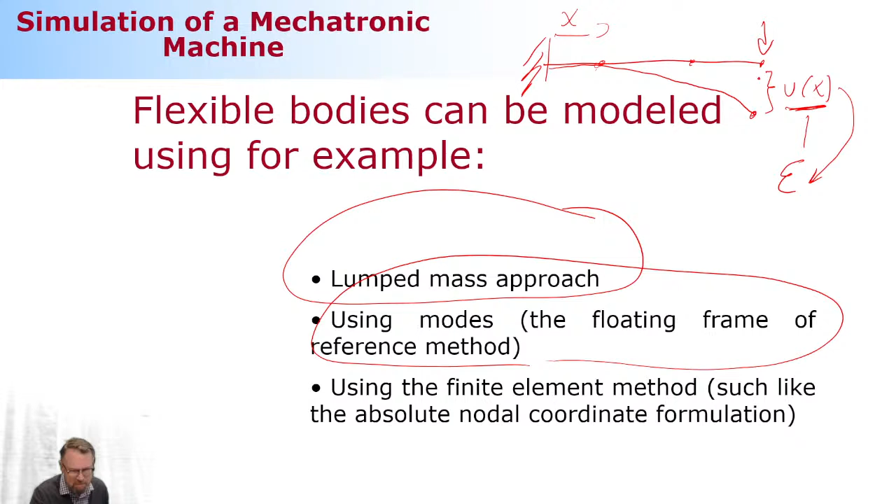In most of the literature, and I'm sure in everything you have learned so far, this relation is assumed to be linear. You can compute the linear relation between the displacement and strain, which is okay, but limits you to small deformation. Is that a big problem? Well, depending on how you look at it, because here, as I described this cantilever beam, the deformation looks pretty good. It looks realistic. What do you think? This is how it deforms if you do this in real life. Yes. Now you say yes.

Okay. So what happens if I increase the force here, if I put more force in the system, and I still have this assumption about the linear strain-displacement relationship? Then it starts to look a little weird, because the deformation is going to be like this. The free end of the cantilever beam remains in line where it was in the original configuration. So it's not moving at all in the longitudinal direction. And this is not what you see in reality.

Can you see the deformation like this in reality? No, you see the deformation like this. This is what you see in reality. And now the big difference is this: the free end is actually also moving in the axial direction. To take that into account, you have to use a nonlinear strain-displacement relationship, which complicates everything. Your life is going to be way more complicated than it was. This is called geometrical nonlinearity.

There's another source of nonlinearity, which is called material nonlinearity, which is not common in dynamic applications. This material nonlinearity is the relation between strain and stress. I'm sure you have seen these famous graphs of strain and stress like this. Steel material behaves like this: there's a linear relation, and then it becomes nonlinear like this. So again, if you're introducing a lot of force, there's going to be a lot of displacement, a lot of strain. You might travel all the way here.

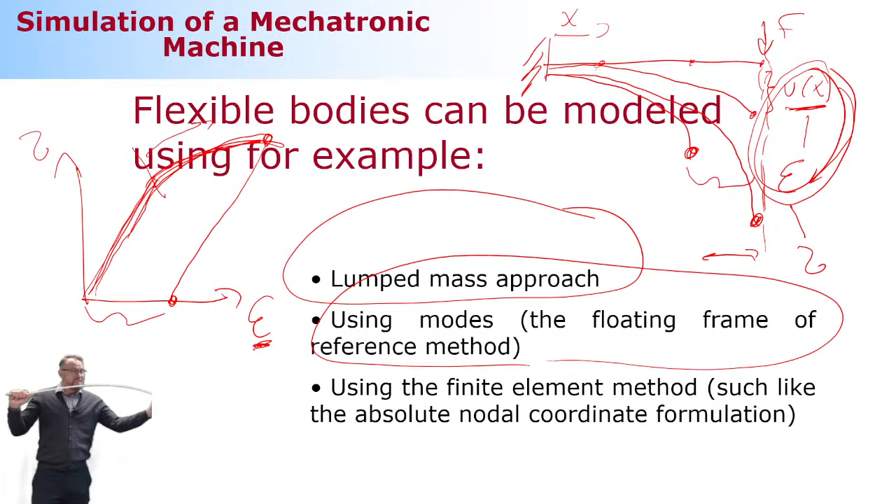Bad design. Because if the brand new crane is already bent after the first lift, the customer is not going to be happy. They're going to call you and say, I want a better product, your product sucks big time because it's not able to handle the load. So that's why this other nonlinearity is not very common, whereas geometrical nonlinearity happens every now and then.

Again, this is a mechanism. So you have a deformation, displacement, you compute the strain, then you compute stresses. You may be mostly interested in this one.

In a design, if you know the stresses, this is very often used as a design parameter, because the stresses need to be below a certain value. Particularly if it is dynamically loaded structures, which could be suffering from fatigue, you better know the stresses, and even the stress histories, how much the stress is changing as a function of time, because otherwise you may suffer from fatigue problems.

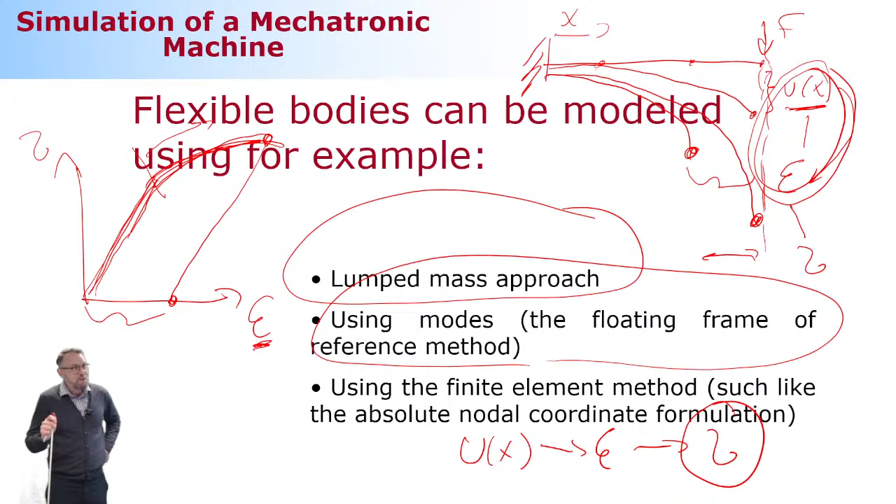We can get back to this fatigue a little later, not in this class, but in a class that is entitled, correct, laboratory course. You guessed it already, I guess. Okay, all right, so this is what I just explained to you.

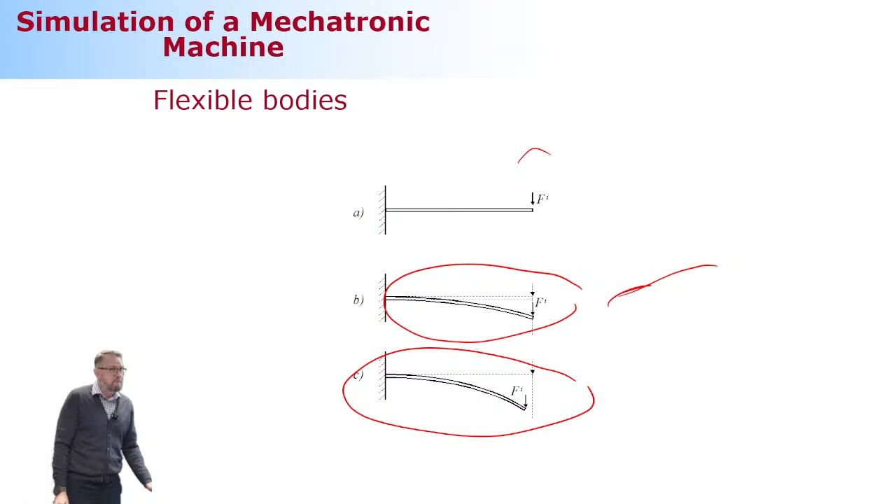So this differentiates the flexible bodies, if it is small deformation or large deformation. Here, this is a linear strain displacement relationship. This is nonlinear. This looks okay, because that's pretty realistic. But the bigger the deformation, the more unrealistic it starts to show. So which one is linear and which one is nonlinear? They are not that different, but response-wise there is a pretty significant difference.

So like I mentioned, there was a desire from the student union to explain what the research is in LUT. If you look at the papers in the teams focusing on dynamics, including Jussi Sopanen's team, most are related to developing methods to describe these large deformations. There's a big, thick body of papers about how to make these models computationally efficient in a multi-body frame. But in this course we're going to look at more simplified ways to model the deformation.

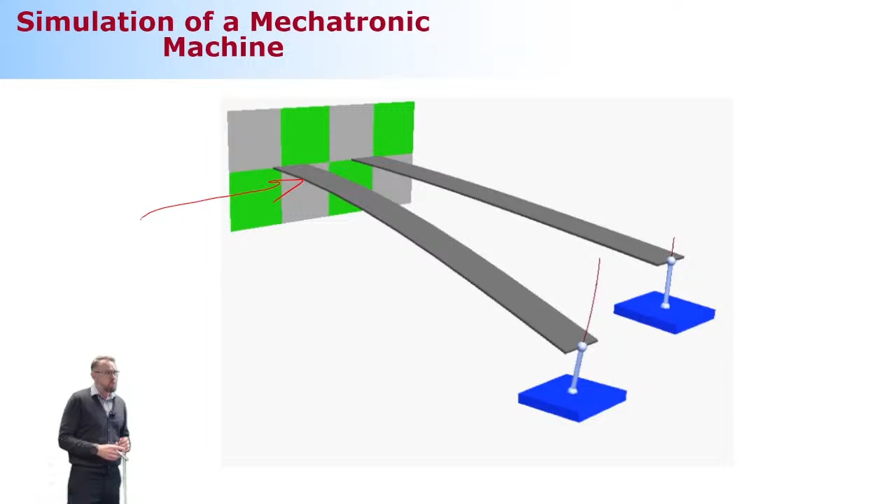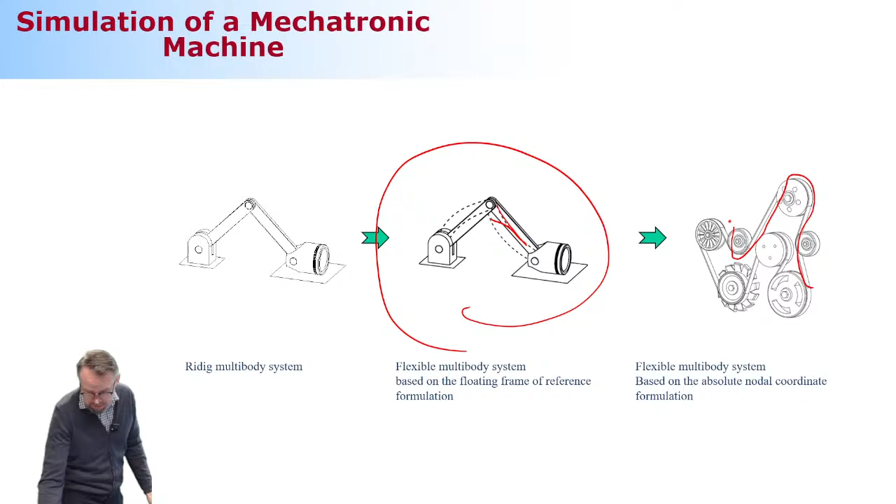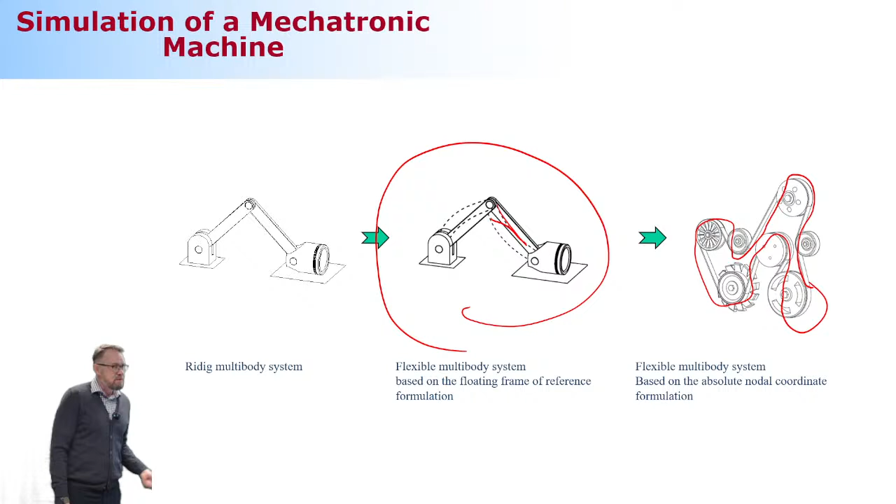What these research teams want to do, they are not just happy to describe small deformation, like the connection rod in a crankshaft mechanism, but they would like to be able to describe a belt. And the belt is undergoing large deformation. This is very challenging. And this is where most of the methods developed are focused: clothes, cables, drapes, wire ropes, and so on.

But one of the methods commonly used to describe the deformation is the lumped mass approach. This is not strictly speaking based on the theory of flexible multi-body dynamics, because it is an extension of rigid bodies. It works like this. You have an original body, typically a beam-like body, because otherwise it's really difficult to use. You describe your beam-like body with a number of rigid bodies that have roughly the inertia properties of your original body.

And then comes the magic component: you introduce spring elements to all 6 degrees of freedom in spatial applications and 3 degrees of freedom in a planar application, which introduce forces between your rigid bodies. Because of these spring forces, it acts like a flexible body as a total. So now multiple bodies become one flexible body. That's the idea.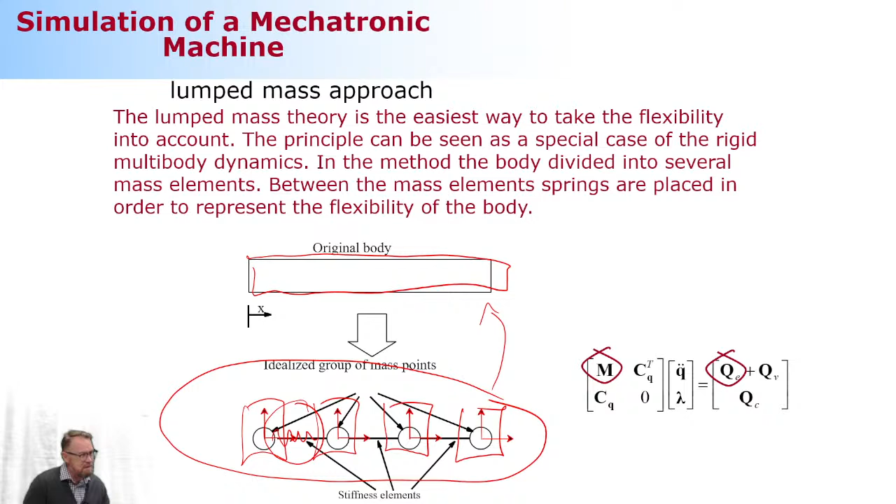Not used anymore. This technique was very much in fashion a million years back, but not so much anymore, because there's a big problem: you have quite a bit of effort to compute multiple rigid bodies. And it is problematic because some of the springs are pretty stiff, particularly the ones related to axial deformation. Simulation doesn't like discontinuities, but another big problem is natural frequencies spread across different frequency regions. This is what simulation always struggles with.

Let's say that you have, again, your cantilever beam, modeled using these rigid bodies with spring elements between them. And then you have a force that is not perpendicular to the structure, but a little bit other than perpendicular. The force is pushing this downwards, and I'm measuring the deformation in the downward direction. But if you take a really close look, magnifying this response a lot, you see that there is a vibration like this.

The vibration like this is simply because the axial springs are deforming. They are acting here. They are not making any difference in terms of the big picture. This is irrelevant, so it's something that you don't care about at all, but the simulation, the integration time scheme, is able to recognize that, hey, wait a minute, there's something happening with the high frequency. And because it recognizes something like that, it is tuning its time step to match this very high frequency, and the computation is not going anywhere at all. So it's extremely slow computing.

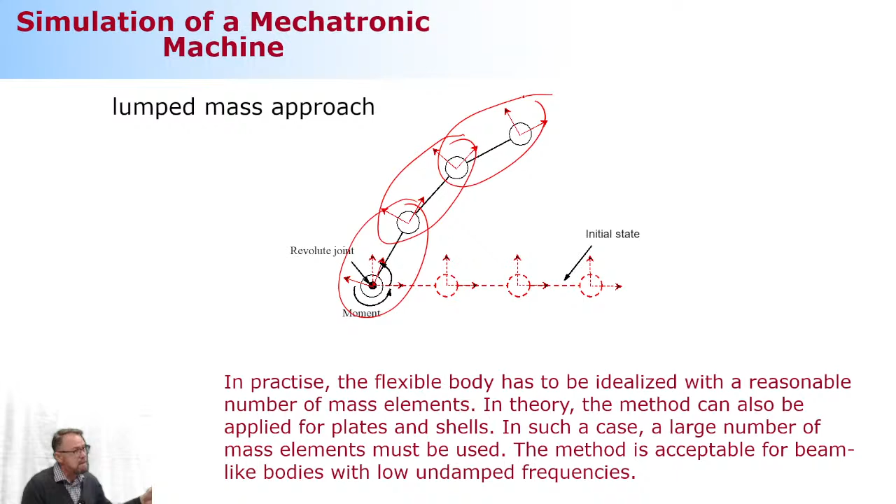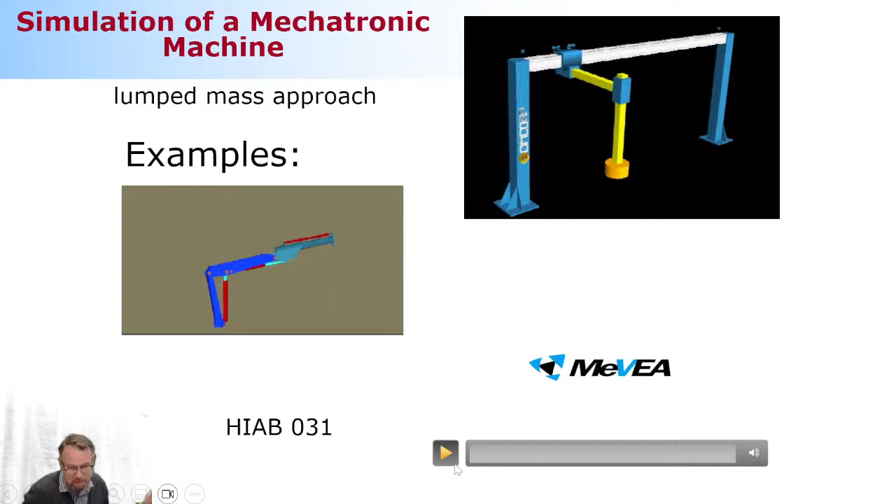Okay, so that's a method, and it can describe even this nonlinear strain displacement relationship, because each of these are linear systems, but when you keep on adding the linear systems, you can account for a certain level of nonlinear deformation. All right, so these are the examples. Cranes that were modeled a while ago, so they are not very big ones. So this is the one that is a cable structure. There are better methods for cables now, but a few years back, this was a standard method for cables. You see, it looks pretty realistic.

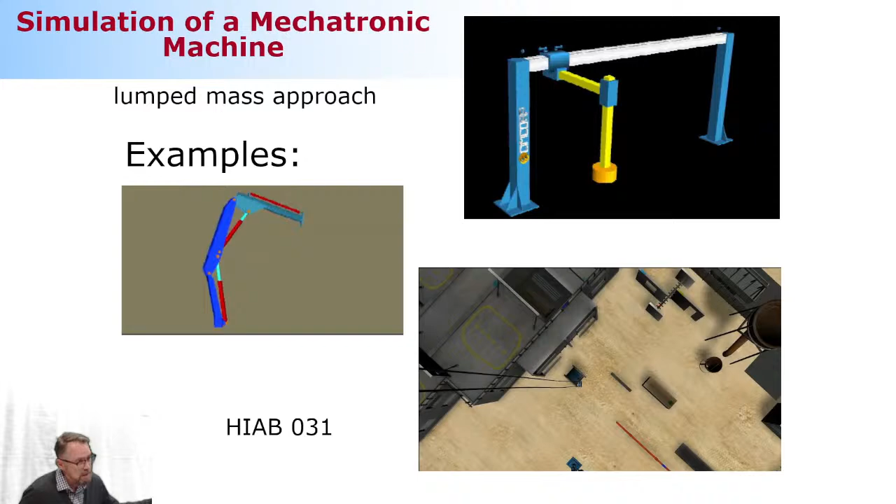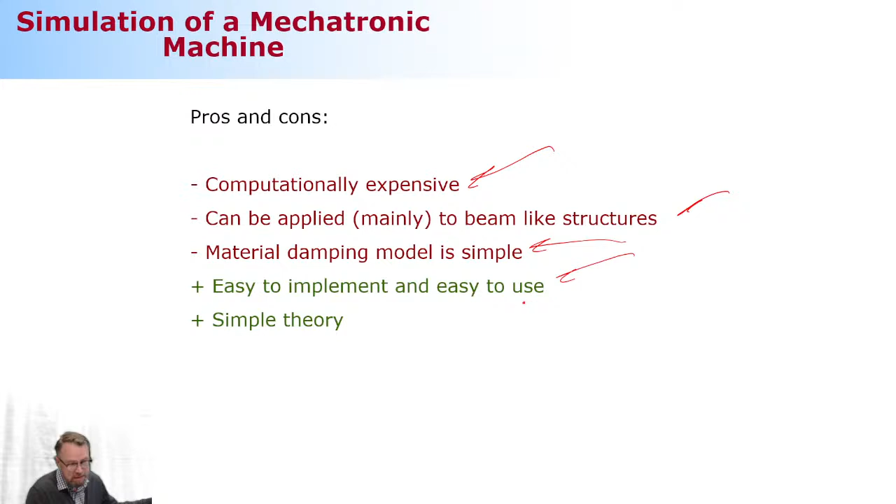So these are masses that are connected together via spring elements. All right, computationally expensive, can be applied for beam-like structures only. Damping models are not very advanced. Easy to implement, easy to use, simple theory. That's the advantages and disadvantages. And I know that we don't have that much time left, but let me introduce this method, which is currently being used heavily in simulation: the floating frame of reference formulation. It makes use of two well-known techniques. One is the finite element model, another one is multi-body system dynamics.

The finite element method is very good to describe small deformations with respect to a reference coordinate system that is not moving anywhere at all. Multi-body system dynamics is very good to model this kind of reference motion, rigid body motion. When you combine these two methods together, you're describing the deformation using the finite element model, and the large reference motion, rigid body motion, with help of multi-body system dynamics. So that's how it works.

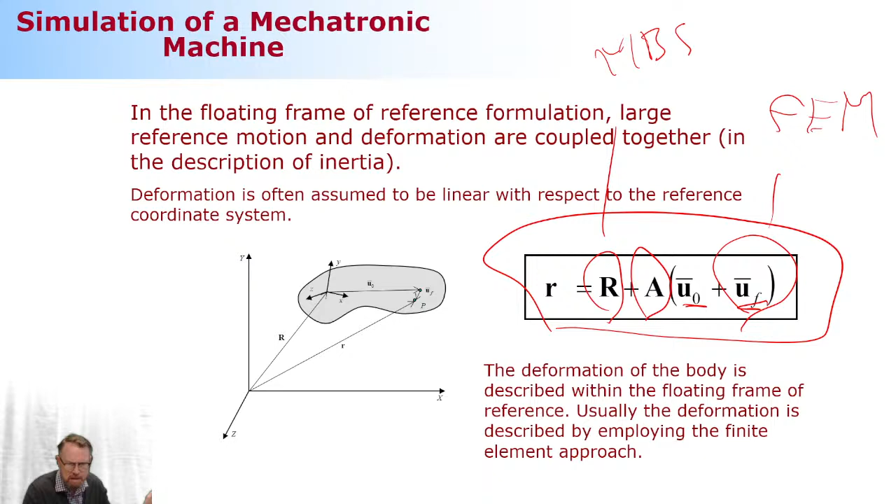The big problem is that if you really look at this method in theory, it's changing the kinematics, because the kinematics now consists of u bar 0, which we looked at earlier, defining where the particle is located, but there's a new component describing how the particle is moving with respect to time. This one will be based on the finite element model. This one and this one will be based on multi-body system dynamics. So this one is multi-body system dynamics, and this is finite element. So that's the combination.

So you are describing this deformation with help of your finite element model, and your reference motion with help of multi-body system dynamics. So you got the concept. The big problem is this: a typical finite element model consists of 100,000, sometimes a million degrees of freedom. So the number of unknowns, the nodal displacements, is typically huge. Particularly, solid elements are very much in fashion, and when you use solid elements, your degrees of freedom become millions, regardless of how simple the structure is.

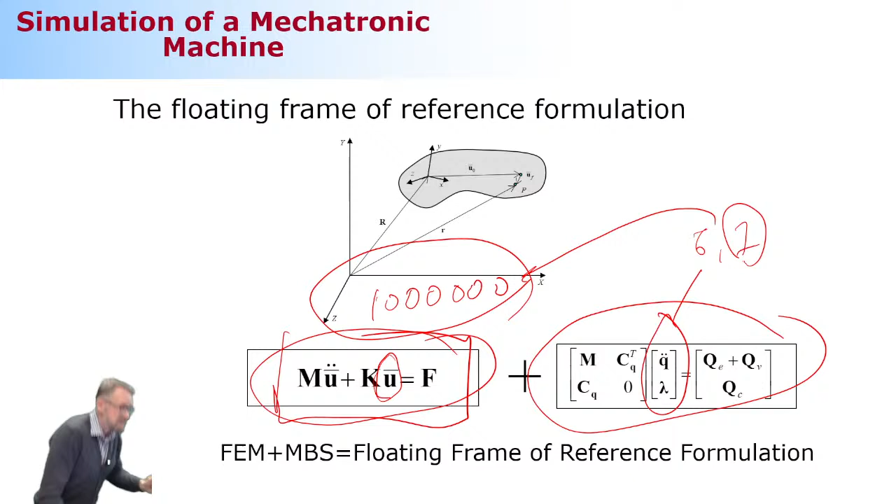And that's not great, because here the number of unknowns for one body, for the spatial case, is 6 or 7, and here it is 1 million. 6, or even in the worst case 7, versus 1 million, they don't get along well. This is way too big. So we need to do something about it, and what is typically done is called modal reduction. As the title implies, we're reducing the model size.

And of course, always in a computation, you cannot get it all. Like in life. Life and computational dynamics, you cannot get it all. In life, I don't know how it goes, but in computational dynamics, it goes like this. If you get high accuracy, it's going to be computationally very heavy. If you get low accuracy, it's going to be computationally very light. So of course, you want to look for a compromise where the accuracy is acceptable and computational efficiency is acceptable.

And the method that is used to get this okay compromise is a modal reduction technique. In a modal reduction technique, you are no longer looking at the nodal degrees of freedom, but you're looking at the way the entire structure can deform. If you conduct an eigenvalue analysis on your finite element model, it tells you the natural frequencies and corresponding deformation modes. These deformation modes can be considered as ways the structure can deform. Each of them can be considered separately, and this is how you can reduce the model size.

How much did you understand about that? That was pretty clear, right? Okay, I'm not expecting you to understand anything at all, but here is a word of warning, because Jussi Sopanen is telling quite a bit more about this, how you're going to reduce the size of the model, how you're going to move from one space to another. Because when you're doing this modal reduction, you're going to move from nodal space to something that is called modal space.

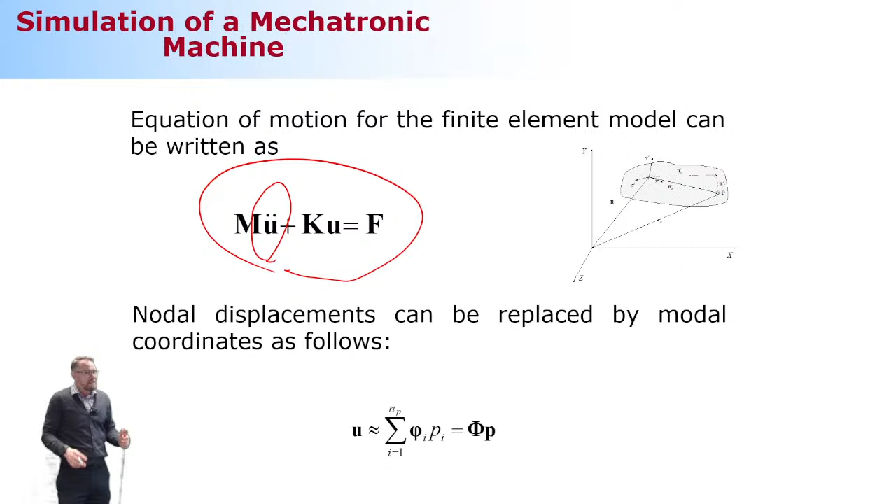I don't know if you can recognize it because of my accent. Nodal to modal. You hear the difference. I need to check later on YouTube if it can understand that. It's really helpful if you watch my videos with closed captioning on. Highly recommend it. It can understand almost everything I'm saying. And you can put closed captioning on in any language you want, including exotic languages like Finnish. All right. This is it. I don't want to say anything more, because I want to leave it at this level.

So this method is heavily used in combining finite element models and multibody system dynamics. For the finite element model, we reduce the number of unknowns from typically 1 million to 10. How? We are using modal reduction techniques. Yes, we are losing a certain amount of accuracy, but it's still acceptable. How the trick is made, you can learn in the simulation lab course.